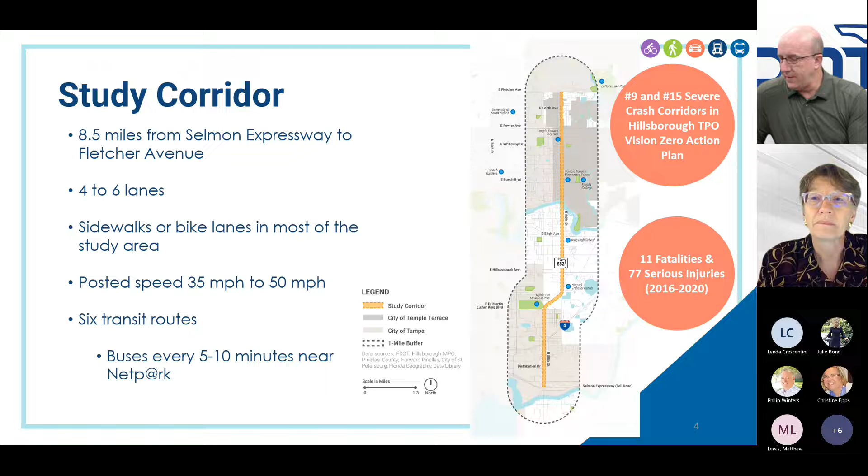Where we're at right now, we recently had our PAG meeting number 3, which is a group of technical individuals, usually from the agencies that are providing some assistance as we do this study. We have the concepts that we're going to present today, and like I said, working up to the public workshop at the end of August. So eventually we hopefully have everything wrapped up by the fall of this year, and we'll start looking at what projects we can get in the ground out there.

In the beginning of the project, we developed a purpose statement of what we intended to do during the study: eliminate fatal and severe injury crashes and prioritize accessibility of multimodal options through design and operational strategies that support existing and future places. So we're not only looking at what's happening now, but trying to forecast what's happening in the future with land development changes and traffic changes, so we can accommodate everybody, keep vehicles moving, but also make it safer.

We collected data, so here's some of the options or issues that we've come up with. There are different sections. This part is about HART, the transit. It's a very busy corridor, and they travel up through here with several routes.

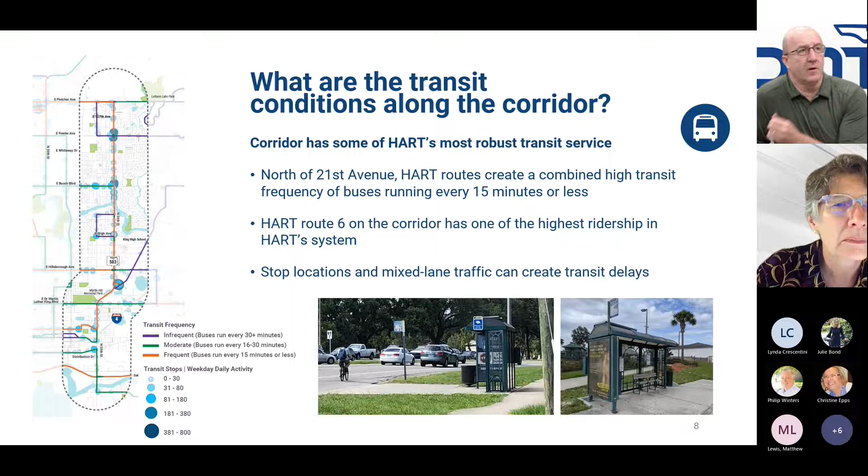There's a lot of safety concerns with the fatalities and crashes that are out there - quite a bit of crashes, over 3,700. You can see locations where there's been fatalities with the stars, and quite a few circles that indicate locations of crashes. There's a large number of large circles there, so there's a lot of issues happening with crashes.

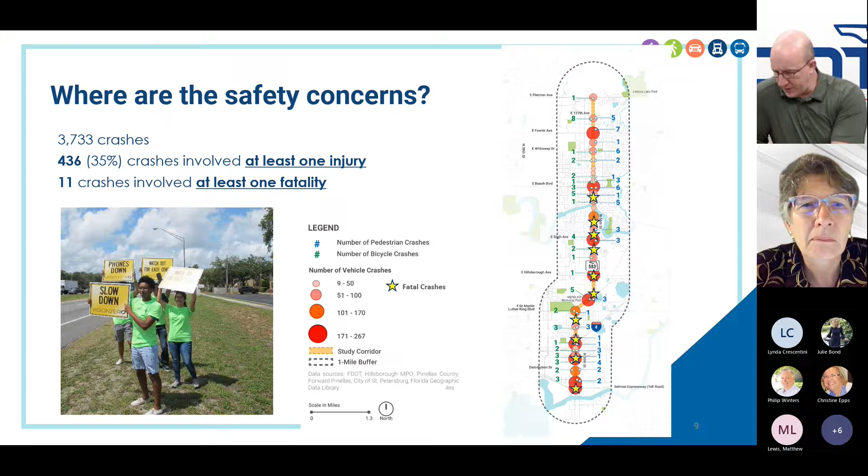And who's really driving out here? The speed limit is posted at 35 to 50 through the corridor, but you can see people are traveling much faster, above 50 miles an hour.

So what we're going to look at is what we can do for speed management, some improvements we could put out there. There's quite a few vehicles speeding way in excess of 70 miles an hour, so we've got to watch that.

Some of the speed management strategies we can look at are signalization, traffic calming devices like speed feedback signs, or just some planning sometimes, or narrowing of lanes. There's a whole range of strategies that we can use out here.

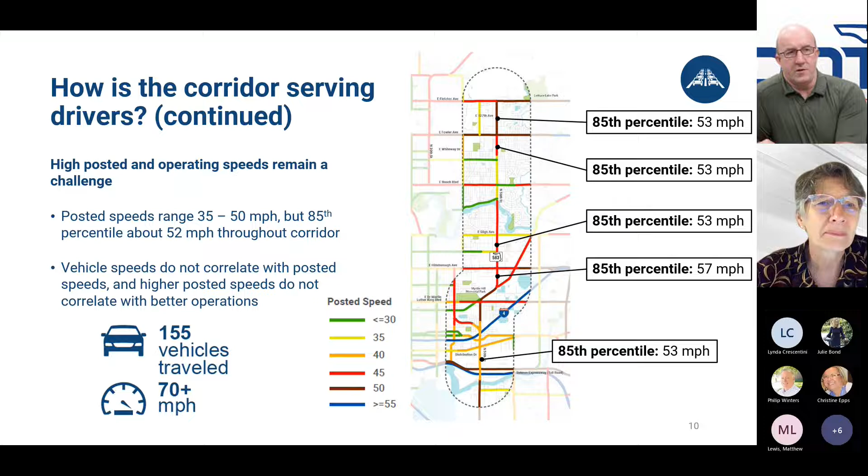So we take a look at who's using what means of travel. If they don't have a vehicle, we're going to look at what buses are available, what bike routes and stuff that they can use to make sure they can get around comfortably. We look at the age groups and income of the area, because that helps us determine some of the features we need to implement out there to serve everybody.

With that, we took that to the PAG groups, had some meetings, and got a list of questions and comments back about the corridor that we are trying to implement from the users that have lived out there and traveled the corridor daily.

Some of the things we heard back here, I won't read them all - this presentation should be available to you later on, or you can always ask me questions at the end, you'll have my contact info. But you see they have safety issues, a lot of speeding as we said, and transit is very heavy. See what type of improvements.

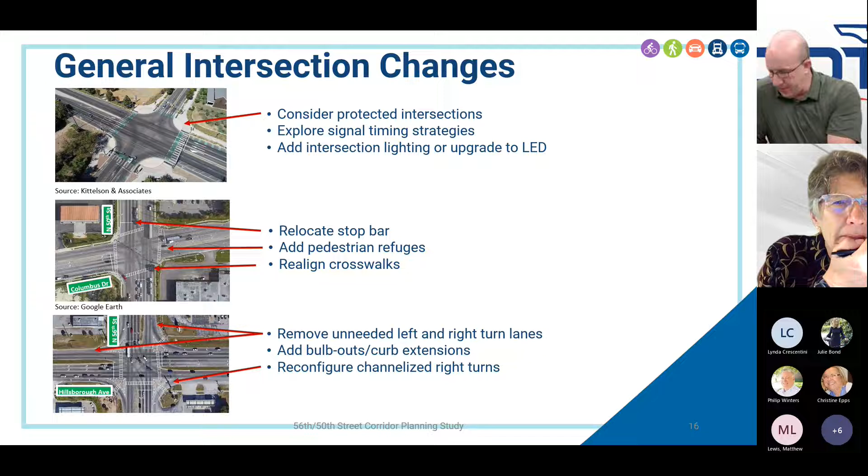Again, here's the Hillsborough intersection we looked at. Some improvements are the green areas on the right, which are bicycle areas. Protected areas for bicycles are coming about, and there's a few downtown areas, but this would be something outside of the city of Tampa. Providing the bike lanes, shortening some of the crosswalks, and changing the right turn lanes gives us some area to build within so we can make these improvements.

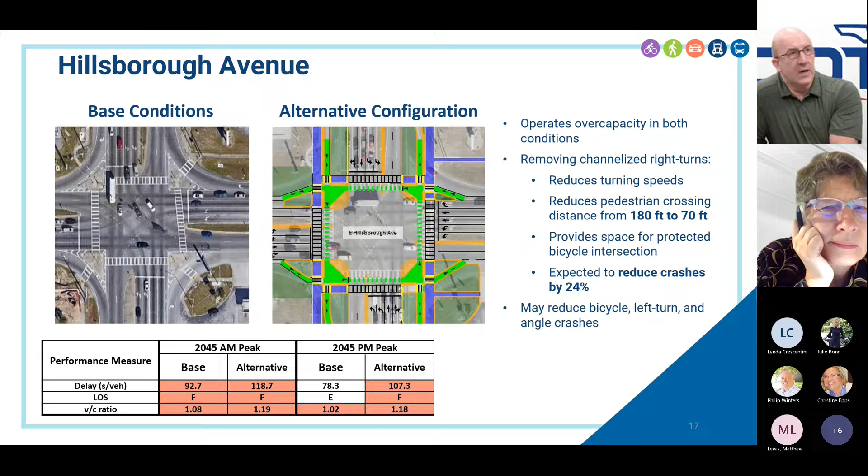Sligh Avenue, right there where King High School is, has a lot of issues. We're trying to reduce the crossings there. It's pretty wide at 120 feet, so reducing speeds and trying to get pedestrians across the intersection a little quicker helps with traffic flow, backing up, and making more conflicts.

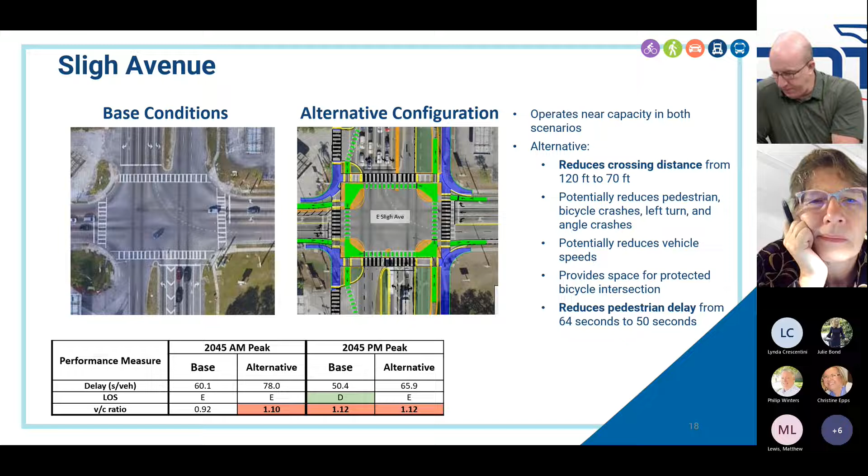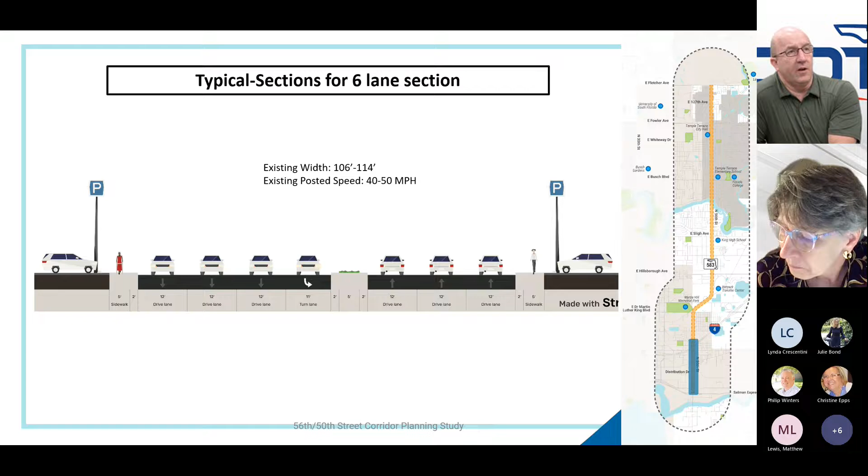Now these are the typical sections running down the corridor, where we run into 4-lane sections and 6-lane sections. These are some concepts we've come up with. The existing typical section for 6 lanes is what you see here, with 6 through lanes, sidewalks on both sides, and a little buffer area. Existing speeds are 40 to 50, so we want to see what we can do to get that down a little to help with safety.

Some of the concepts we have here look at lane repurposing, taking away a lane to make a 2-way cycle track. That's one concept. Another is one-way bike lanes on each side with a buffer area to help protect them, or just making a shared use path on each side where we can get the bikes and peds together and mark that appropriately.

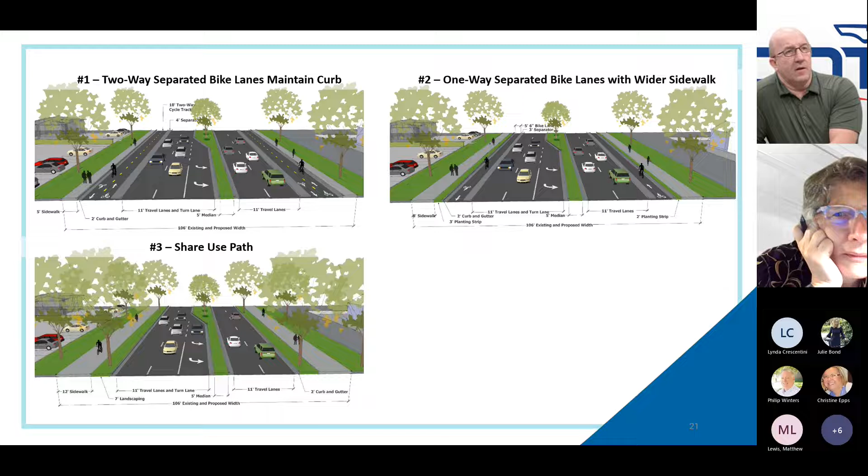Another concept would be just 12-foot path only, keeping the 6 lanes out there. Or, working with Hart and transit improvements, maybe make a bus-only lane for the BRT system to help speed the transit through there and allow for better ridership, hopefully.

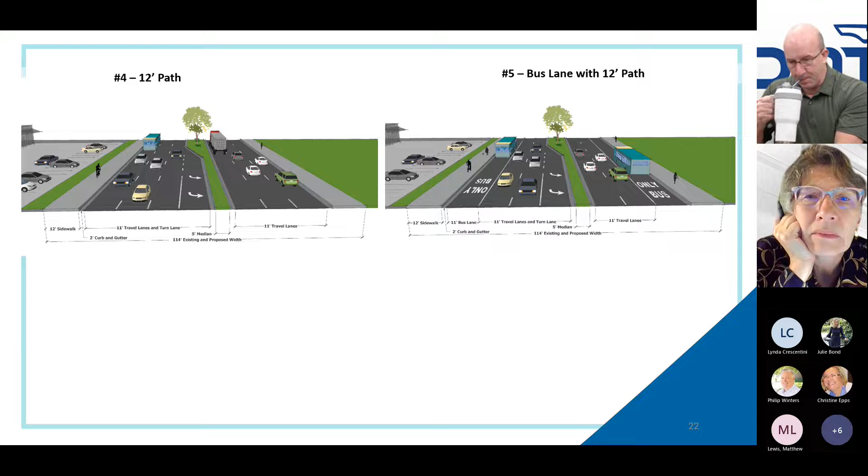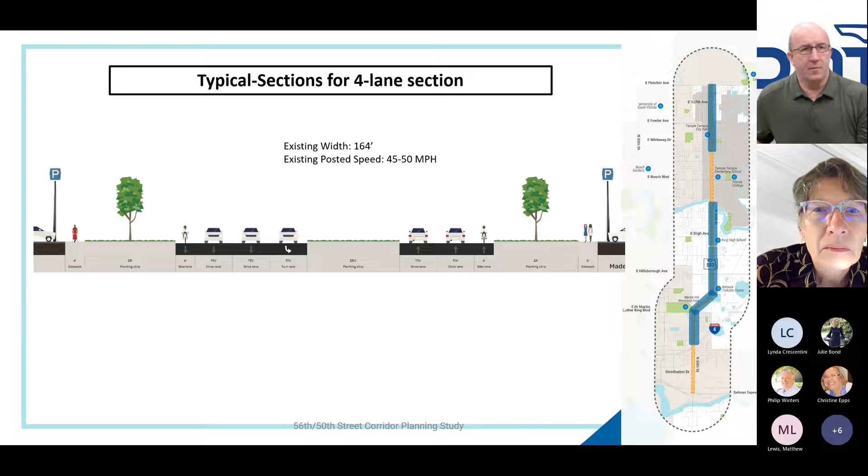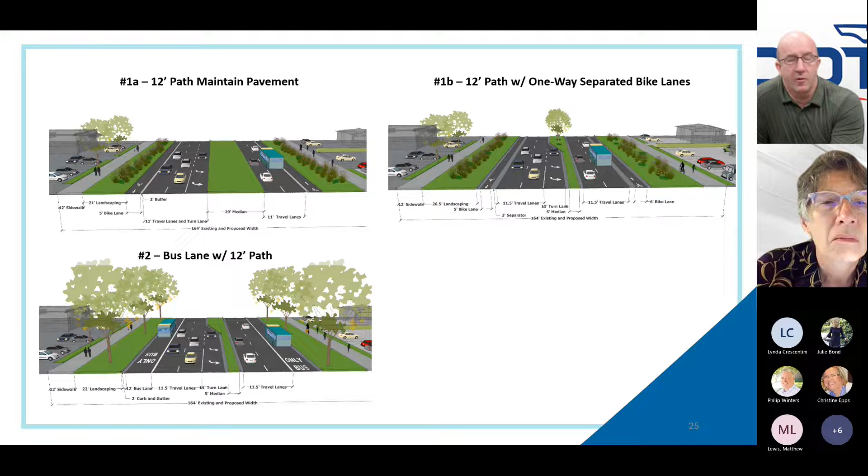Now a smaller area, the 4-lane section, mostly in the northern area through Temple Terrace, has 2 through lanes with bike lanes and larger buffer areas with plantings. Some improvements there include using a 12-foot shared use path, keeping the lane configuration, and maybe narrowing up the lanes to fit a bike lane within the travel area. We could also do some shifting around to allow barrier-protected bike lanes, and add a bus system through there too.

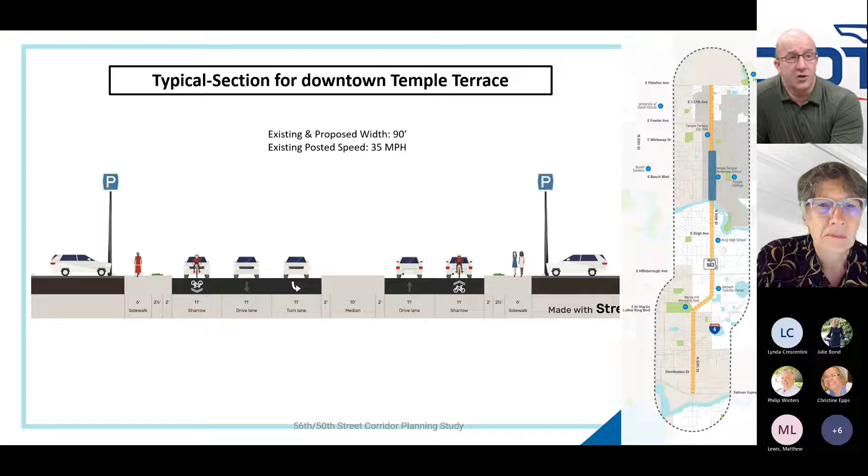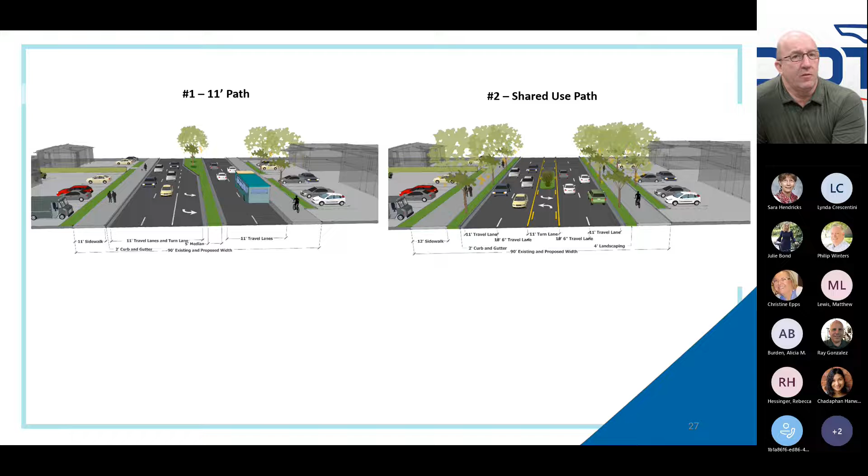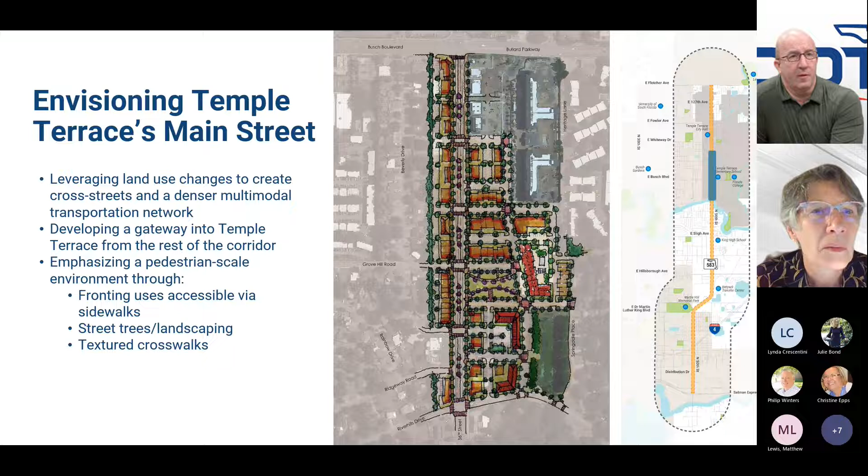Now, downtown Temple Terrace, we're working with them because they have their own improvements. Currently they have Sharrows in a travel lane, with 2 travel lanes. One option would be to take them off and give them a path to get the bikes out of the travel lane areas, at 11 feet, keeping some of the plantings they have. If you did 12 feet and put a 2-way left turn lane in, you could also have a shared use path through there. This fits within some of their improvements they're looking at too. There's some graphics they have going, and a lot of land use changes to apartment buildings that have come through in the past few years.

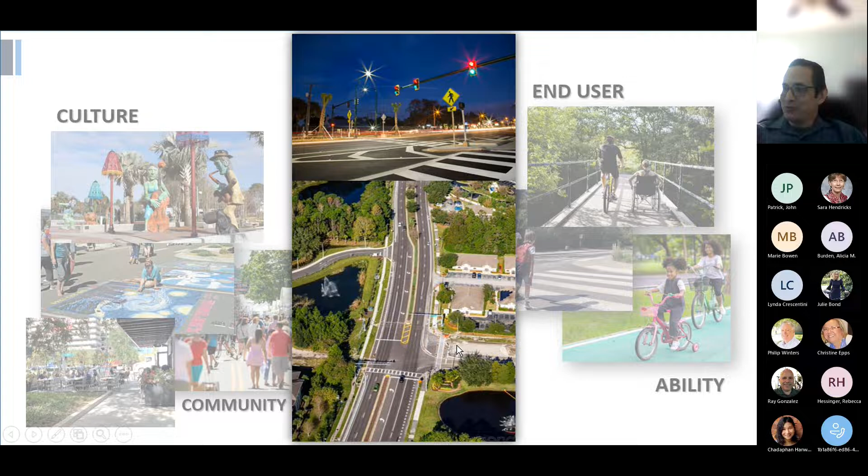So we took the traditional approach to building a road, where you have the comprehensive plan and community plans that plan for the land use, and what the community wants in the future informs the long-range transportation plan that says in the next 25 years, we're gonna widen this road and do this other major intersection improvement here. And those improvements filter into a capital improvements plan, and those improvements eventually go into design and construction.

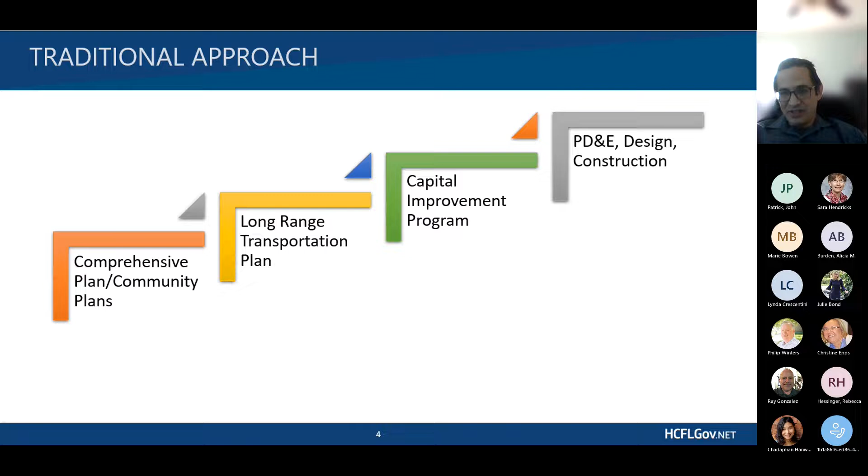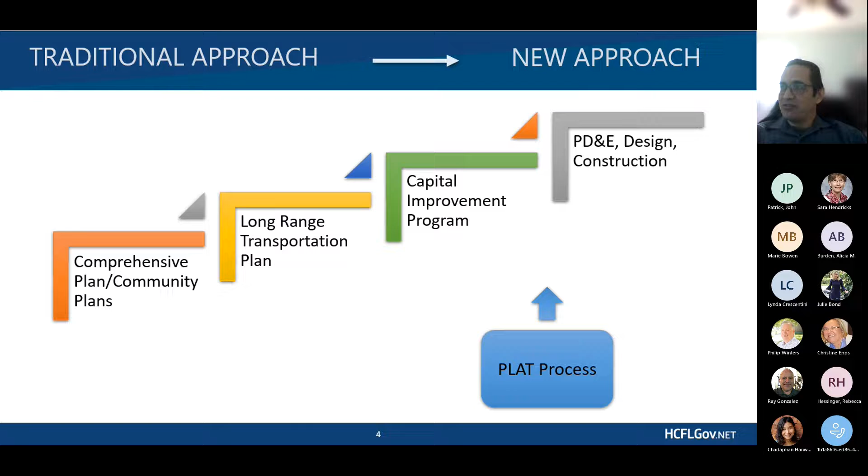So we put the PLAT process between the capital improvement program, which is where you need to build a road, and the design and construction area, so that it informs the ultimate construction of that road. And of course, that leads to the moving of cheese. You have a lot of professionals that would say, no, we are responsible for this element of it. We are responsible for the width of the lanes and how big the sidewalk is and all those things. But it's really not the case. Those things are decided at the community's cultural, civic, and ability level. That's where that's important.

And the PLAT process is designed to bring that in. So it's a three-step process, basically. The first thing we do is we understand our baseline. What does the existing infrastructure look like? What are the community needs? We review the community plans. We look at previous outreach activities that have happened in the community. Look at key stakeholders and how they use the road, and identify those needs, identify the character of the corridor as it is right now.

Then we importantly look at how people move around, and not just the single mode moving around. It's how do people really get around on this corridor? Take a look at its market position. Can the area be expected to produce the land uses that the various community plans have anticipated around it? What's the regulatory environment that delivers that? And importantly, what are the demographics of the area?

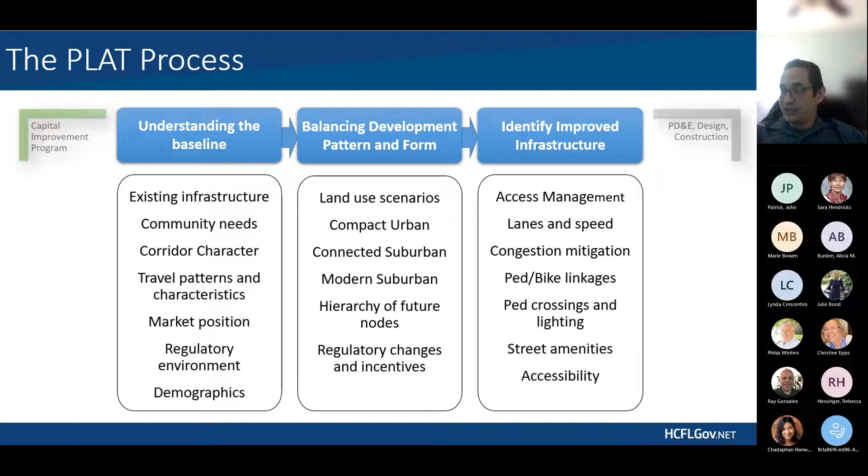And then finally, we look at the road itself. How does the access management need to be looked at? What's the proper target speed for the road? How many lanes should it have? Congestion. We look at the pedestrian and bicycle linkages and how people cross the road. And then in some cases, we'll look at amenities and absolutely look at the accessibility of the road. This is because of the corridor, go back to that nice, pleasant suburban corridor that we saw and how the market responds to that type of corridor.

Corridors are a major part of defining place. And the land uses evolve around those corridors based on the signal the corridor gives. The corridor is a permanent investment. You're not going to come in there and build it once and then come in 5 years later and build it to another entirely different land use approach. This is multi-million-dollar investments done in increments of 20 to 30 years if you're lucky.

This was planned to be this way. And it was a unified land use transportation plan. They looked at the uses adjacent to the road and designed it for what they wanted to happen. So let's get into 131st Avenue. You guys should know where it is and have an idea of types of users on this road. One of the important things to look at is the demographics.

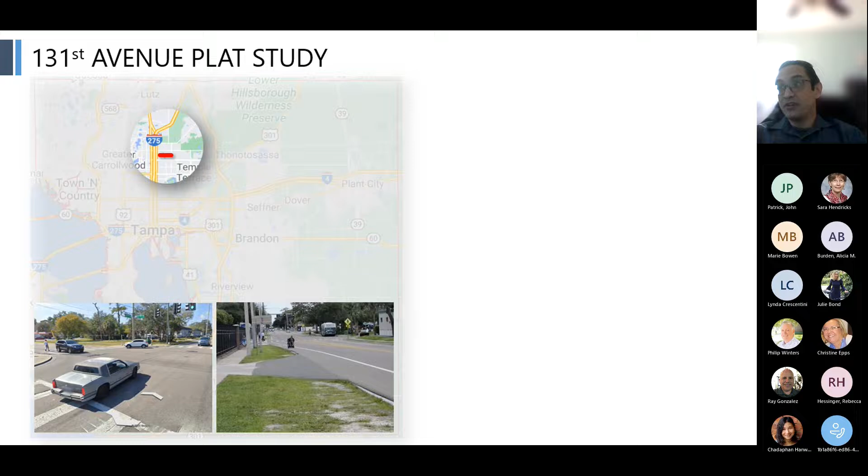So countywide, there's 1.6 people per acre. 7% of the households are zero vehicle households. This area is actually one of the most densely populated areas in Hillsborough County, close to 8 people per acre. And the number of zero vehicle households is tremendously high, 31%. So that's already telling us that the users we're looking at here are going to be more pedestrian and bicyclists than is anticipated in any of those comprehensive and long-range transportation plans that are more general in scope.

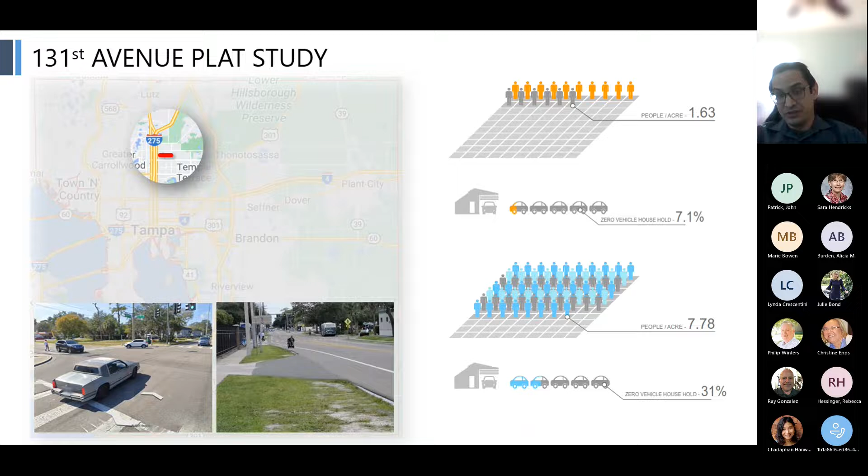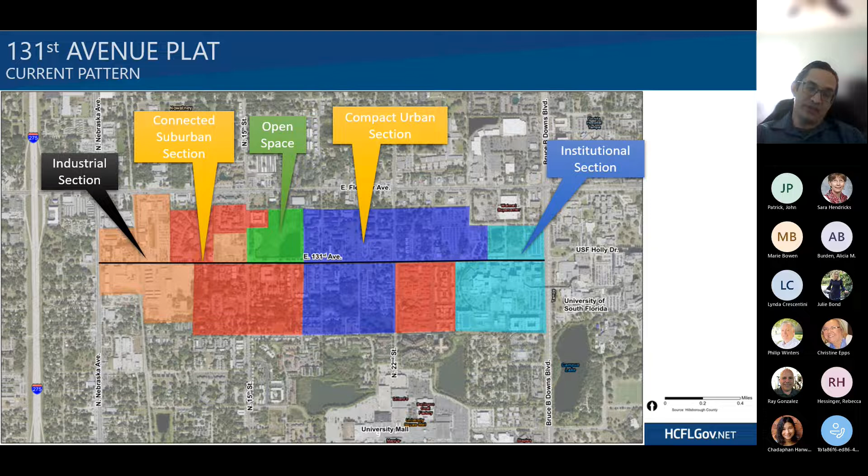So how do people move around in the area? This is eye-opening. We looked at big data, a firm called Streetlight that aggregates cell phone signals to see how people move around in the area. And importantly, about 50% of the trips using the corridor begin or end on the corridor. So it's not really a through route, it's a destination. And if you look at it in the regional context, it's obviously a destination. It's only 1.5 miles long, and it doesn't have a regional connection. So it's clearly a destination.

And about 30% of the trips on this corridor, these are the automobile trips, are 2 miles or less. So those are trips that can be taken out of the car and put into a bicycle or a walking trip. So again, this is pointing to the importance of the bicycle and pedestrian user on this road.

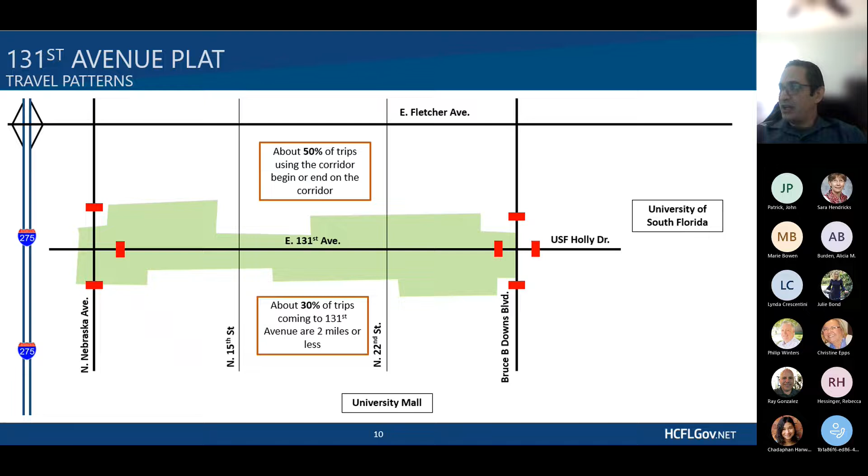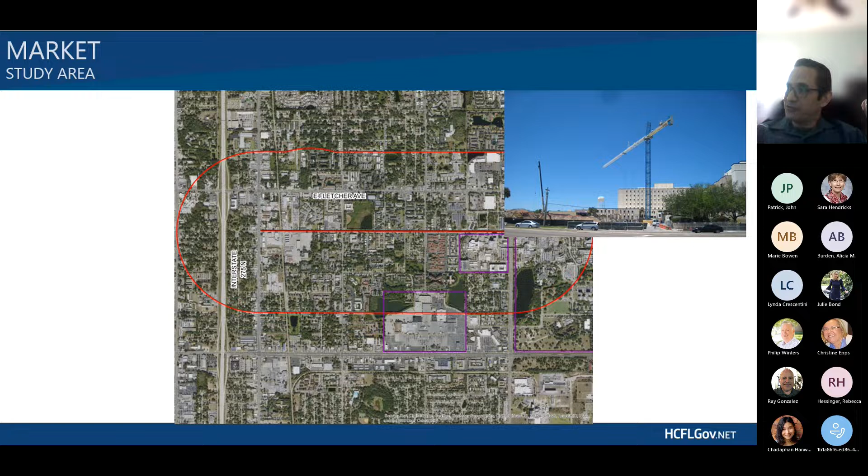Looking at the market for the area, a few big anchors. You got the VA hospital that continues to expand and is a major employer in the area. It's one of our biggest hospitals in the region, actually. The University Mall redevelopment into Uptown with several million square feet of employment coming in, anchoring the east end of the corridor. And then obviously University of South Florida with a huge number of employees and students in it at the very end.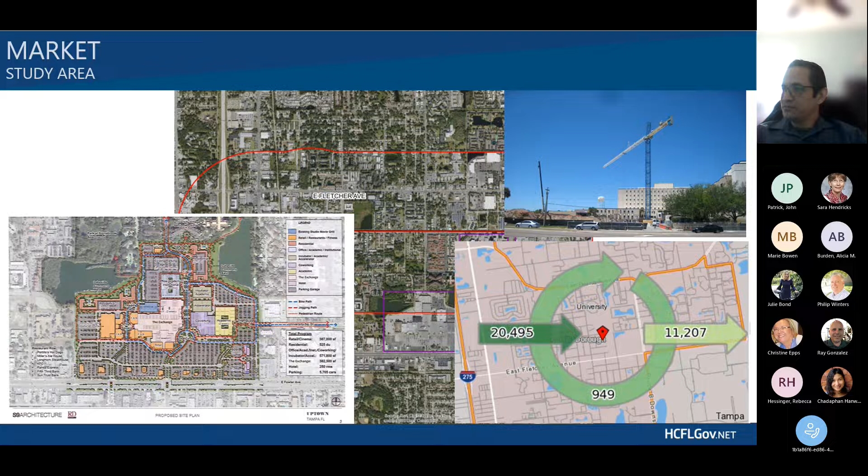And what that points to is this is the major employment center. You have about 20,000 people coming into the area to work. 11,000 people live in the area and work elsewhere. But importantly, people don't live and work in the area. See, this number is much smaller, 949 people that both live and work in the university area. So that points to an opportunity to bring in more residents that can both live and work in the area.

So we took this and put together a set of recommendations. I'm going to start with the area-wide recommendation. And that's complete the pedestrian network. Connect to Harvest Hope Park on the north, move off the corridor, and if you're going to do a pedestrian-oriented corridor on 131st Avenue, think about people needing to walk to that corridor, so improve the sidewalk connections to the corridor itself. Bring the lighting from top of the pole to something a little bit more pedestrian-oriented.

Importantly, take those stormwater facilities, break down the fences, and turn them into amenities that share regional stormwater, because this area right here is in the plans as the downtown on this street. And this downtown, in order to reach what it needs to be, needs to deal with floodplain.

The Duck Pond watershed is a very small watershed. There's a lot of floodplain in it, and this is the bottom of it. It's the bottom of the bowl. So there needs to be floodplain compensation in order for this area to redevelop into the main street it wants to be. That's one of the recommendations from the study.

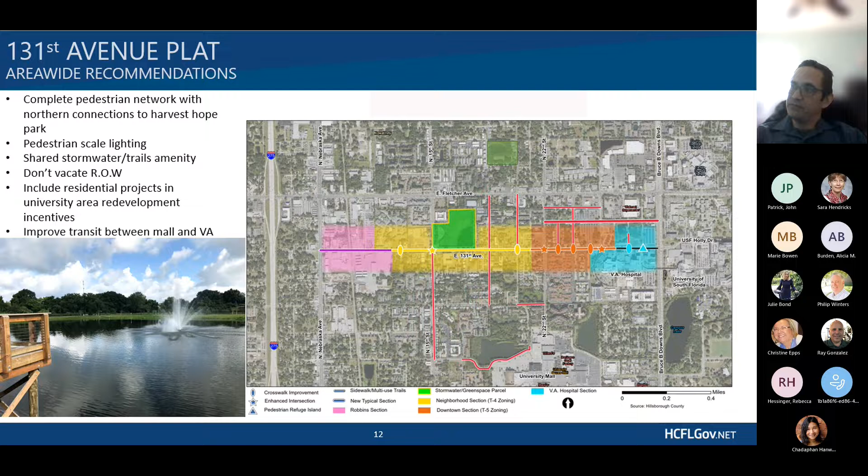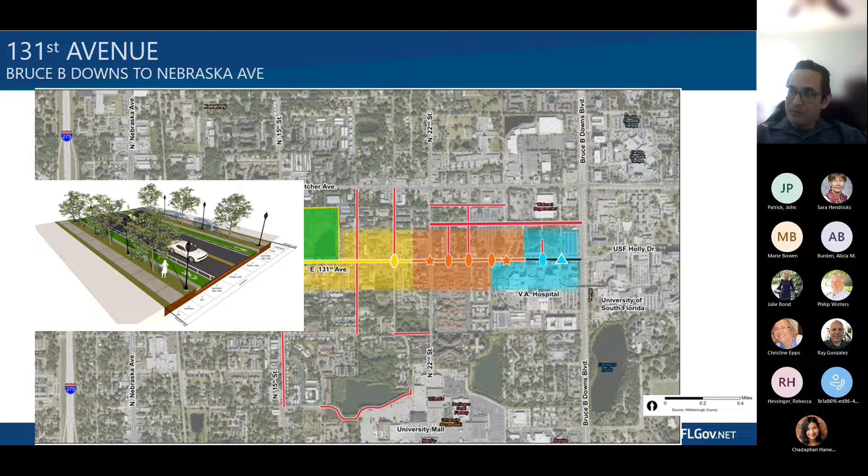So the improved infrastructure, starting in the industrial section, what we're looking at is a cross section with lower target speeds, 25 miles an hour range, separated bike facilities, separated sidewalk facilities, and importantly, this is a cross section that takes up the same space that a more urban cross section could take, so that as the industrial areas and the car lot redevelop into something else in the future, the road can evolve with them. This is a cross section that is easy enough to convert to on-street parking and even lower target speeds.

The neighborhood cross section is more urban neighborhood in scale. In order to bring those buildings up to the street and frame the 131st Avenue, bring in the on-street parking, widen the sidewalks even more in this area, narrow the lanes so that you can have a target speed that promotes using the sharrow.

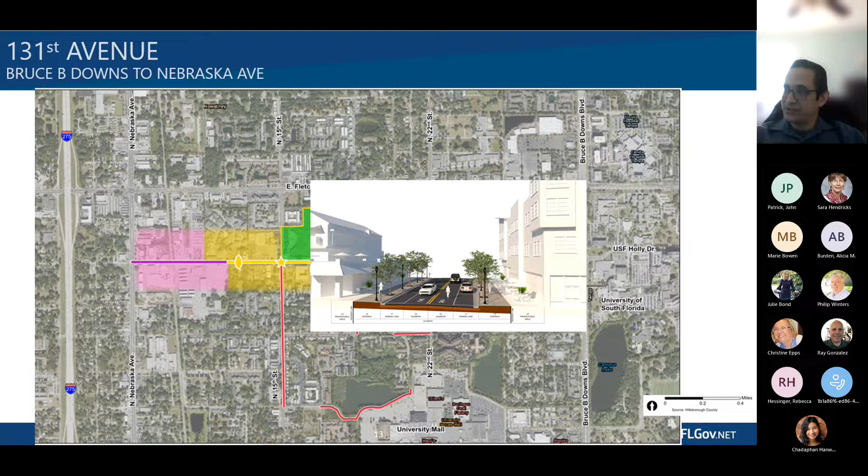On the main street, keep that target speed low, maintain your on-street parking. What you're doing here is because you're expecting to have more pedestrian users, and that interaction anticipated in the plan calls for that more urban frontage. The sidewalk should be wider, and we're recommending a codes provision that brings even more activity with a frontage on the private side of the property that would be more of your sidewalk dining and whatnot.

And then finally, the current VA hospital cross section here, what it's really doing is doing everything it can to improve the experience for the pedestrians. Importantly, this crosswalk is actually today on the other side of the entrance to the VA hospital. Bringing it back here actually reduces the number of crossings that people have to make, and can improve the safety in that area significantly. And so they don't have to cross several lanes of moving traffic and turning traffic.

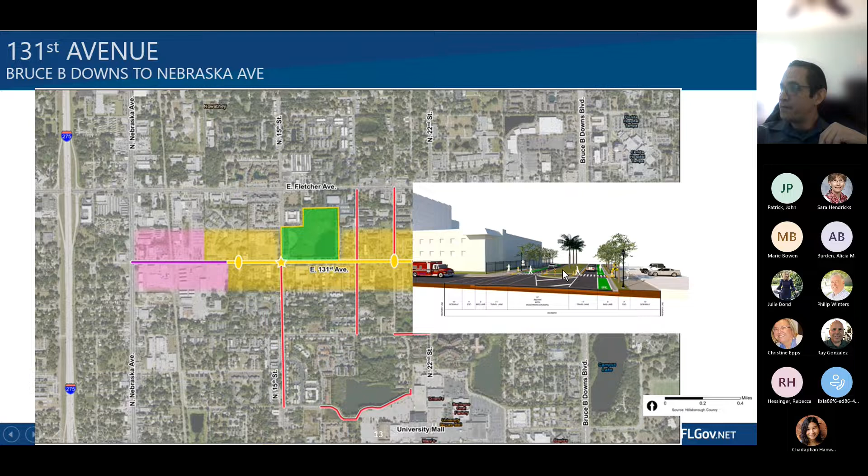So what have we done to date on 131st Avenue? Well, I'm going to start from the west again. And on 15th Street, you might have already noticed the speed tables that have gone in, the elevated crosswalks, pedestrian signage, and improved lighting. At the end of 15th, we're putting in some intersection improvements. We have funds for design, but not yet construction. So at 15th and Fletcher, there's a design coming in.

Right now on 131st Avenue, we are installing some pedestrian warning signs, and we are drafting a PD&E for a complete street improvement on the area that will follow the recommendations that I showed you previously from the preliminary land use and transportation study.

And as we move towards the VA hospital, a lot of the intersection pedestrian improvements that were recommended in the PLAT study are being implemented there, especially as you go from the employee parking to the actual facility at 27th, Livingston and 28th Streets. The sidewalk gaps will be filled. The crosswalks are going to be better marked, and the safety for the people crossing the street, the informal crossings that exist there right now, will be formalized through that process.

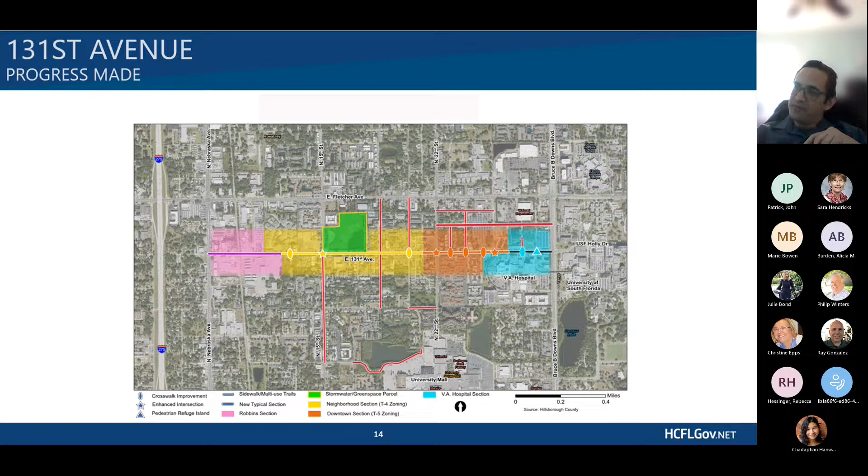Then finally, the sidewalk on the east side of Bruce B. Downs is in the construction phase, and there are some intersection improvements at the VA hospital entrances that are also in the construction phase. So now I think Rebecca can get into a little bit about the Uptown District Infrastructure Plan and what is going on with that.

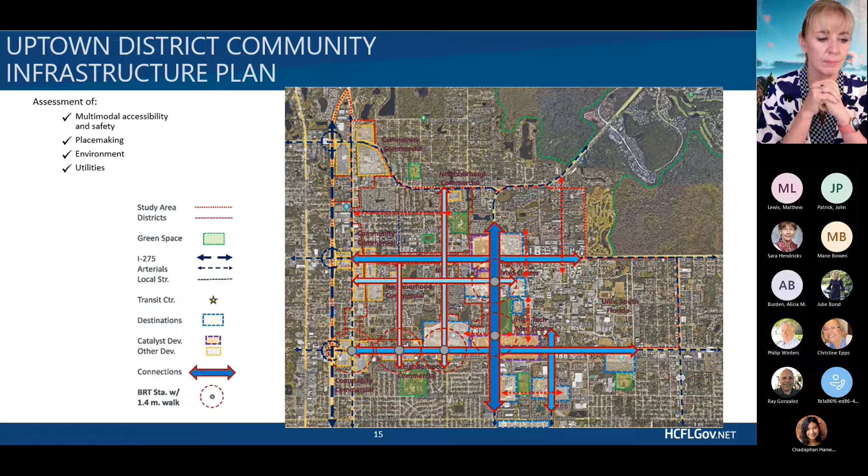So to wrap it up, as you can see, there are a lot of things going on. The projects that Matt mentioned, I put in the chat so that you can take a look at each of the projects in a little bit more detail. You can email us, call us, and we can give you more information if you need.

And 131st Avenue, that's where we started, right? So 131st, the PD&E study is underway. They are incorporating all the recommendations that we identified in the PLAT study, which is a good thing. And now that PD&E study is almost complete.

So they are going to be looking at outreach pretty soon. We don't have specific dates yet, but we will keep you guys informed of when the outreach is going to happen. That will show you the 30% plans on how the corridor will be, and the alternatives and alignments that they are looking at. So that will be part of the outreach and public input part of it.

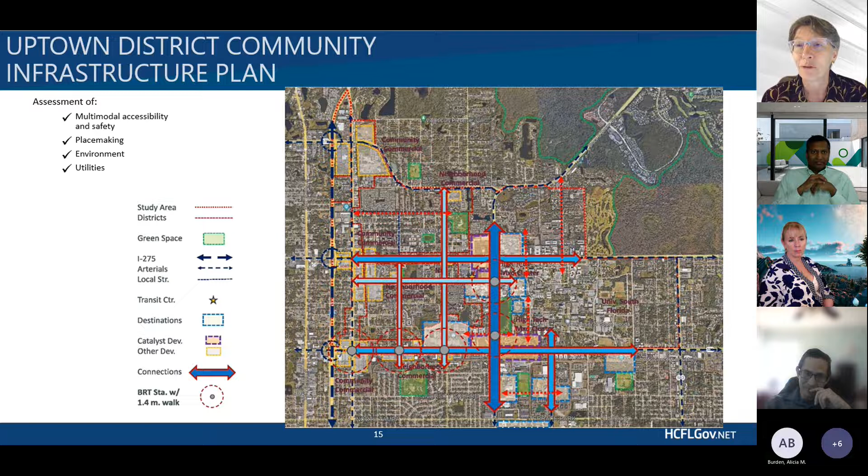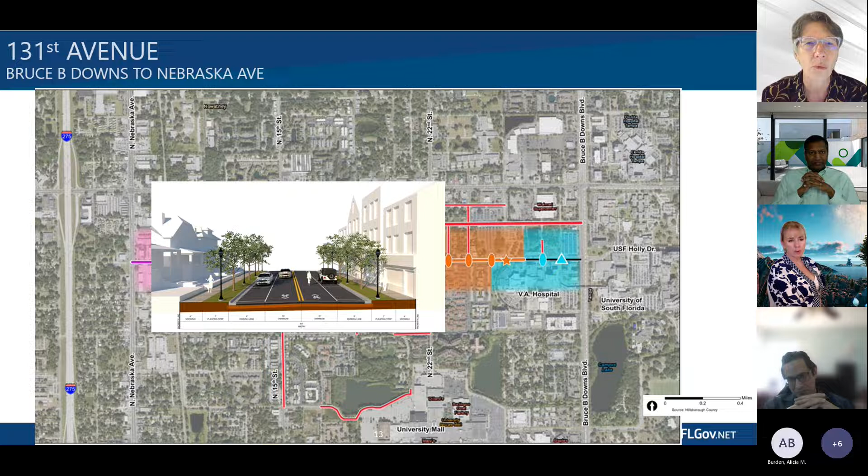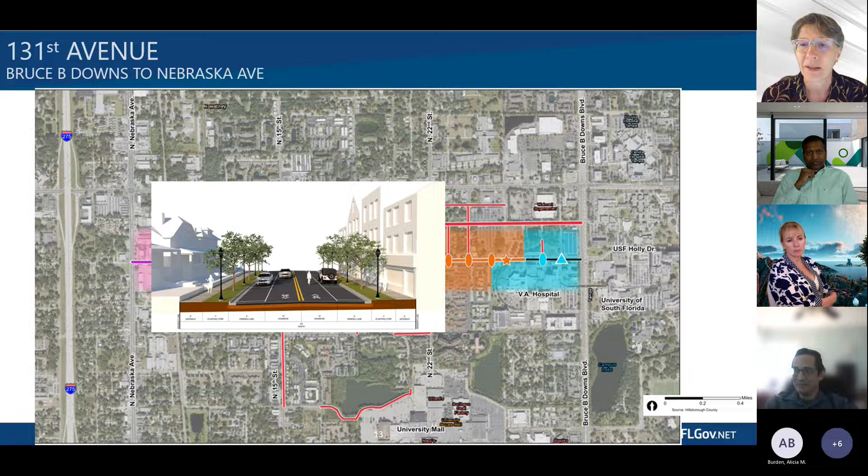I notice in a lot of the renditions, landscaping is part of the right of way, which I think is really critically important, particularly to pedestrians. And I was just kind of curious—this is probably too soon to be thinking in detail about this, but is there a role? Is there a county office that is also looking at the feasibility of the landscaping along that area with regard to whether there's enough green space to support trees and tree canopy? I know there are various technologies where you build basically a kind of root well for the trees, but that also limits the size of the tree that can be put in there. I was just kind of curious if that has been part of the early conversations about what the landscaping is going to look like along here that will make walking through here pleasant.

Absolutely, absolutely. That is part of the PD&E study. We are also pushing our engineers to think about more ecologically friendly landscaping and how they can incorporate some green infrastructure into this project as well. Each time we bring it up they say the cost goes up, and we say we don't care—that's a push and pull of it. And definitely that is part of the conversation we are having right now. Of course, more appropriate trees have to be placed in these locations. Things we have done in the past, like planting oak trees in just a 5-foot or 4-foot landscape patch, have caused a lot of trouble with sidewalks and roadways. We are not going to be doing that, but we are looking at appropriate landscaping. Definitely, that is part of the conversation and needs to be part of the conversation. It's really hard for walking and biking, so I think that is definitely part of the project.

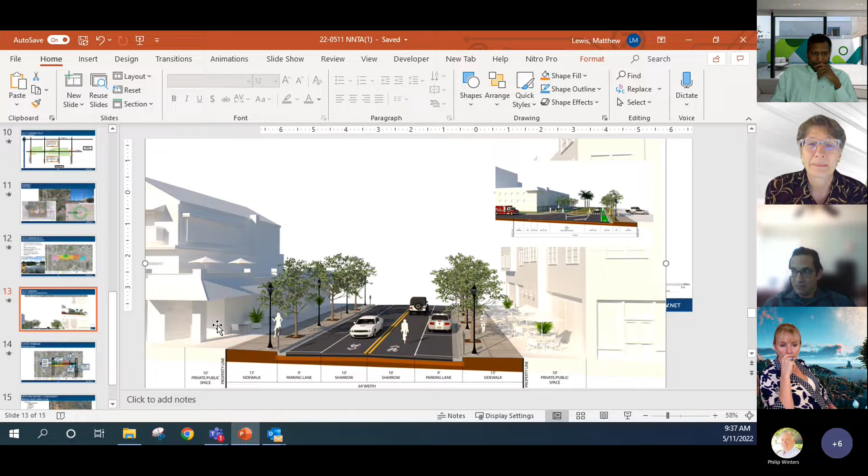Good. Yeah, unbundling the parking from the rent, giving people the option since they maybe don't need a garage or a parking spot, would make it even more affordable. They could put more into the housing as a result. So adding that flexibility could continue to develop it in the character of the community. Absolutely. As well as to office and commercial, unbundling the parking and providing parking cash-out to employees.